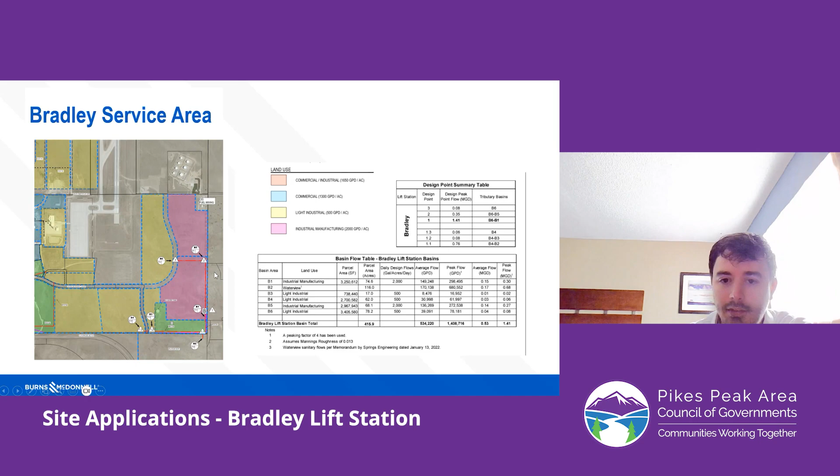Grinnell, also known as Airport Park, has been there since the early 90s, I believe, and its current flows are around 0.2 for peak hour flows, based on the meter data provided by CSU. So they're pretty low as far as what flows they're receiving right now and what they have received for the last 30 years. Although the development plan for that area could get all the way up to 1.2, currently it's not seeing that.

And then Drennan lift station, I don't know that I have meter data for that one, but I think it's within the 1 MGD range, I believe. So that's the kind of future for Grinnell and Drennan. And then Peak lift station, it's small enough that it's just going to go to probably 0.35 immediately with only the few users that will be tied to it. And then Bradley could phase in over time.

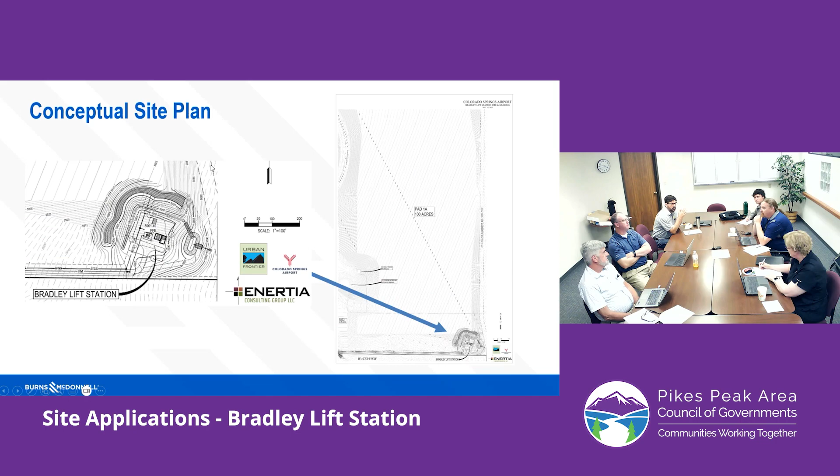That's a fair question. No one wants, I particularly don't want more lift stations, so. The topography of this area is very challenging though. Most of these drainages are separate and discrete. Where the Peak Innovation Park is, where the Peak lift station is, that wants to flow towards the Big Johnson Reservoir. So you can't really get it out to a common lift station, if you will.

Bradley is on the edge of the airport's property, and we're doing the studies and alternatives analysis now to see what we would do with land to the east of that. So we are working on determining Colorado Springs Utilities' path forward, and that includes several alternatives. One of those would be a regional lift station towards the bottom of the city property.

There's other ideas about connecting to the Lower Fountain system. There's ideas about building a new wastewater treatment facility out there too. We just haven't fully settled on one yet, but we're going through that analysis as we speak. So it's important

as we do that analysis and move forward, we really need to keep the timing good for the airport, and this lift station we see is valuable and lets them construct something now that can serve their development, since we don't know what we're going to do in the future, and what we would do in the future, we expect to take quite a bit of time to get that implemented and built. So we're comfortable, CSU is comfortable with the Bradley lift station and the way that's set up.

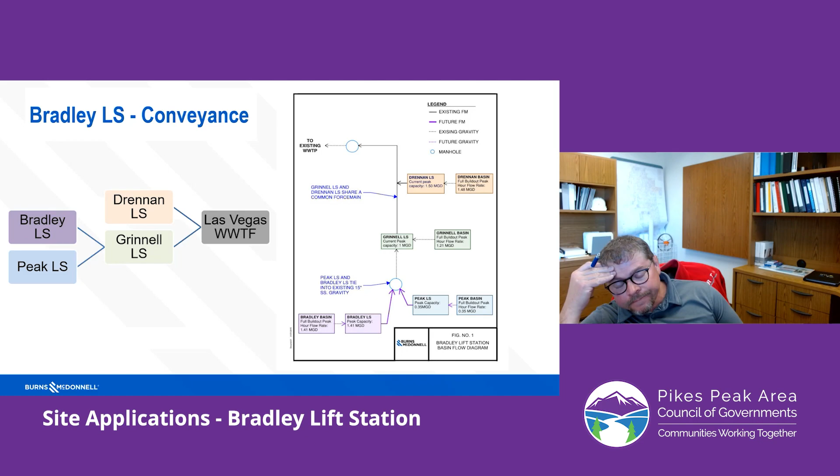Tyler, how long of a line is the force main from Grinnell to the manhole that gravities to the wastewater plant? I think it's about 2 miles, Justin, is that right? I'd have to look it up. I think it's about 1 mile, or a little bit less than that, where it connects with Drennan.

But also Justin and I were looking at the asset information for Grinnell or Airport Business Park, and I mean, that lift station's in great condition just because it hasn't been used. I'd imagine the force main could be fairly similar for a PVC.

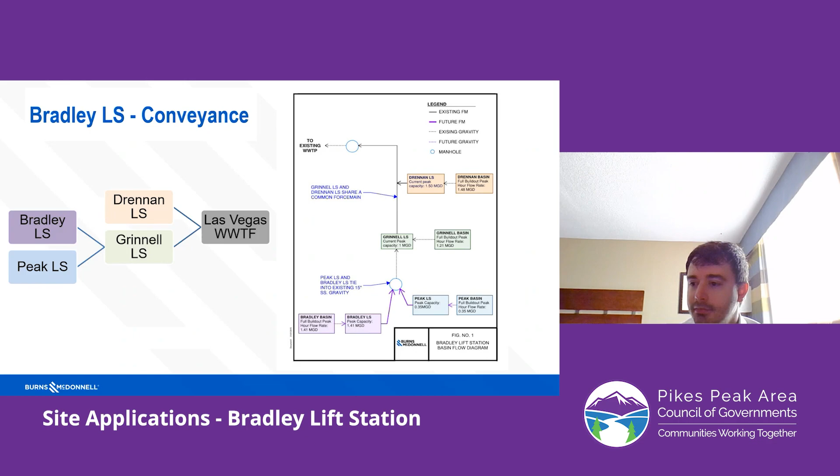I'm really loving this discussion because I think, number one, the discussion with CSU is saying, hey, we're looking big picture here, and in this area particularly, if you guys come back with another lift station, what our concerns are going to be. And we're a recommendation board, right? I mean, we're not the final say, but I think people are going to weigh our opinion and our vote. And I agree, nobody wants raw sewage running in the gutters or anything like that. You don't want it, we don't want it. But it's good that CSU's on record now about their game plan.

If there's not any more questions, what is the board's wish on this applicant? What's the board wanting to do? Well, I think we've raised our concerns, they're on the record, and as you say, CSU's aware of them. What was the recommendation from the SARC? To approve it once they answered our concerns about the force main. Right. So that was our big concern from SARC, the force main.

I would move to forward a favorable recommendation to PPACG. We voiced our concerns, but I don't know that we've provided any magic solutions, so. Not building that force main, which is probably not economic. Right. So that's my motion. Okay, is there a second? This is Mark. I'll second it.

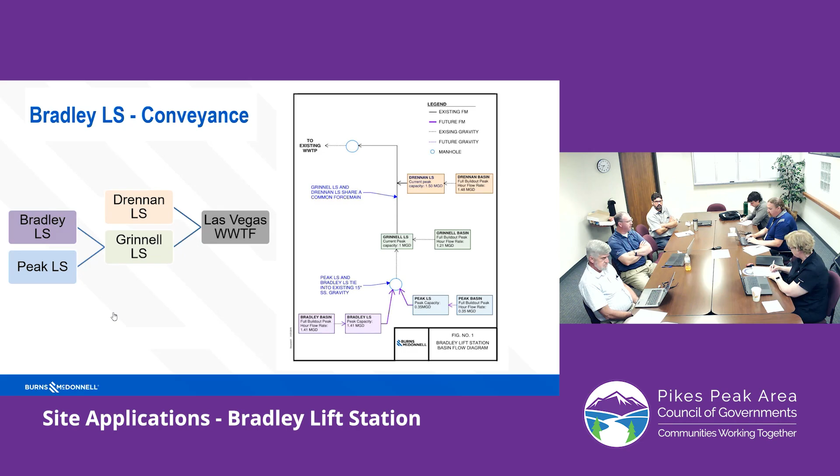Thank you, Mark. Any more discussion, any more questions before I call for a vote? Hearing none, all in favor? Aye. Aye. Any opposed? Hearing none, that passes unanimously of those here. Thank you, Tyler. Thank you, Justin, for your presentations. Thank you, guys. Again, we're just all in the same boat, right? Yeah.

All right, go ahead. Maybe just a comment. I don't know if it would help to show this committee the lift station facility plan and what we would do to inspect, just overall. Information is good information, I think. All right. So if you got stuff, but to Mark's point, and it resonated with me, a schedule of some sort, here's our game plan from CSU specifically for this area, I think that would resonate with us. Okay. Maybe we could do a little bit of both, once our studies and alternatives analysis for growth on the east side's a little more firmed up. I'd be happy to show it to this group, you bet.

And I'd also be happy to show it, I'd start with the SARC. It's just information. We're not really applying for anything, but it feels like you guys got a lot of questions about what we do and what goes on, and it might help you guys get a little clearer insight into what the game plans are, both for growth and to address the aging infrastructure.

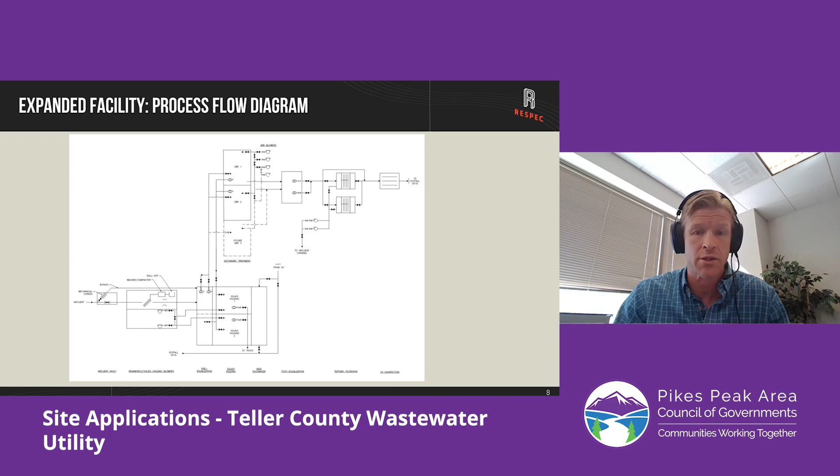Additional or a new backup generator will be provided. The facility currently relies on a cistern for plant water. We are running a new potable water line and gas service from a neighboring development. Supplemental emergency influent overflow capacity is anticipated to be provided into the west of the two future solids holding basins. And of course, all equipment will be provided redundancy per PPACG design criteria.

Once again, Woodland Park will continue to provide ORC and operator support for the facility, with Teller County Wastewater Utility maintaining the facility as part of its overall service area, and will pay for operations through sewer rates. Any other questions people have about redundancy, happy to address.

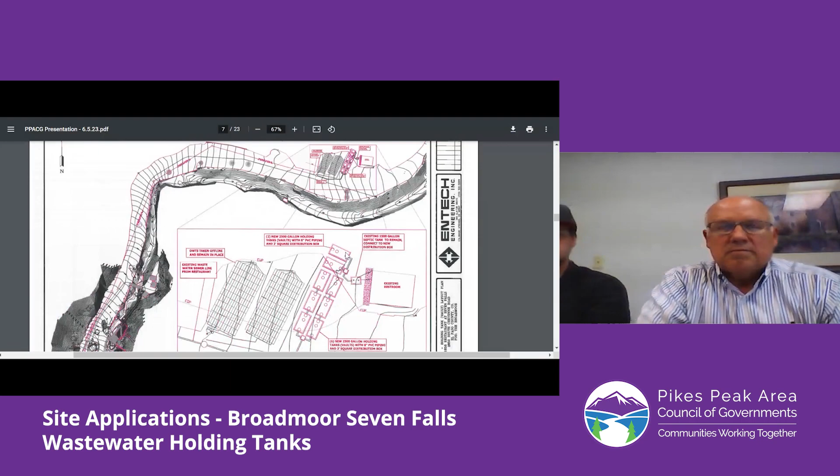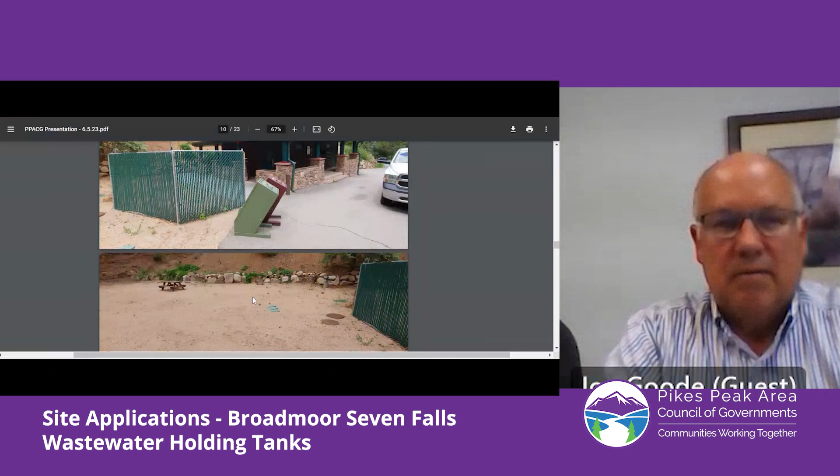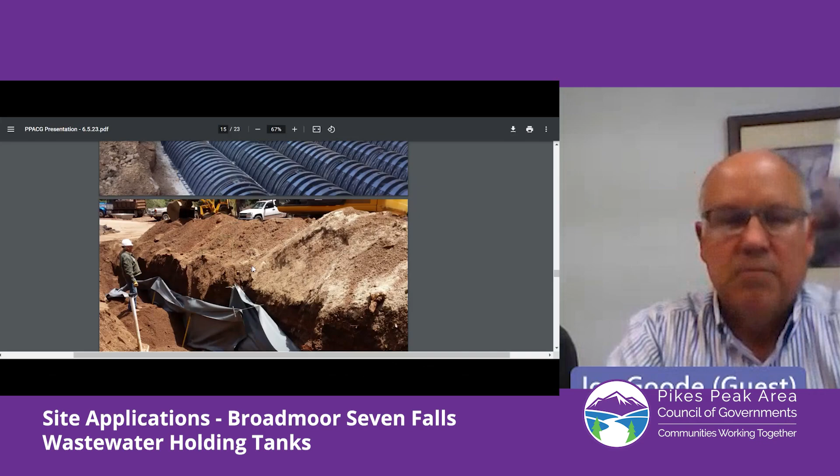If any of you have been to Seven Falls, it's a very tight canyon with a creek and very limited access and room for really anything, including a road. Here's an aerial of the restroom facilities, and the system was installed right in this area. It was a sand system. We had a liner on one side to minimize the flow towards the creek area. It had an advanced treatment system, AdvanTex or microbiotics, up by the restaurant, and a tank.

And two things happened. One is the usage in the restaurant was fairly heavy, and their demand was higher than what we anticipated, or they anticipated, and it ended up at over 2,000 gallons a day. And we've measured flows from the restaurant, and they're very high.

Really July and August are the peak times, when several days they're over 2,000 gallons a day. During the winter months, they're under 2,000 gallons a day, but during the peak season, it's well over. So it pushed us to, one, the other system wasn't large enough, and two, it pushed it into the CDPHE state review versus the local jurisdiction. And we have flow values for 3 years out here, and all of them, once they got going, were too high. And so that's what pushed us into what are the alternatives.

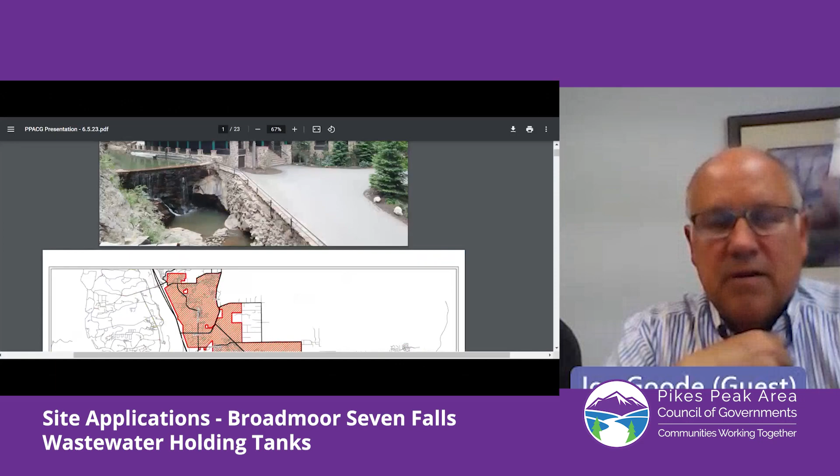We looked at Colorado Springs Utilities, and I'm backing up here, sorry about this. There's the restaurant itself, if you guys have been up there. This map here shows the Colorado Springs Utilities service area. On this map, it looks relatively close, but Seven Falls is right in here. However, it is over 7,000 feet. Let me reduce this a little bit. From the Seven Falls area here to the closest tie-in over on West Point Road, and we have a letter from the city saying that it is too far, and at this point it's not feasible or economical for them to tie into Colorado Springs Utilities.

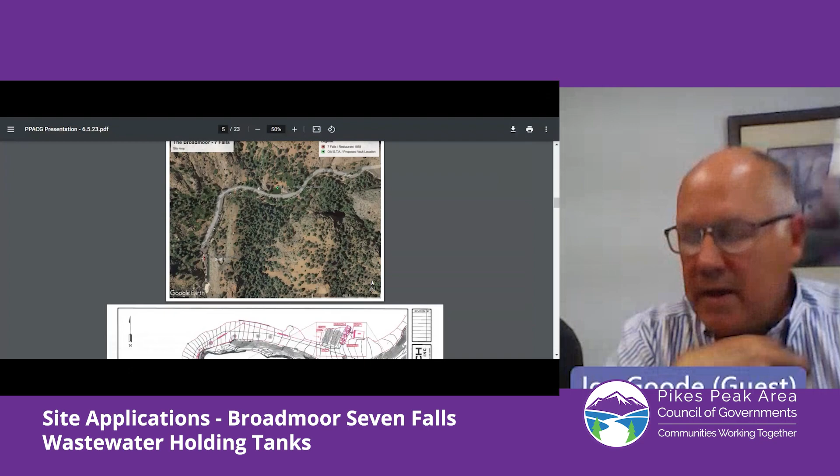The proposed system that we are looking at now is holding tanks until such time. Eventually, Broadmoor does want to tie into the city, but at a time that it becomes feasible. So the interim to keep them operating is a holding system of several tanks. They understand they will have to pump. Let me get up to our tanks. Next one. Yeah, right here, you can see where the old system was. We're proposing several 2,500 gallon holding tanks, which will give us capacity to pump. Obviously, there's not a pumper that can take all that at once. It will give them the capacity to maintain storage while they're operating, and it gives us more than the 48-hour capacity that's needed if we have something that becomes a problem.

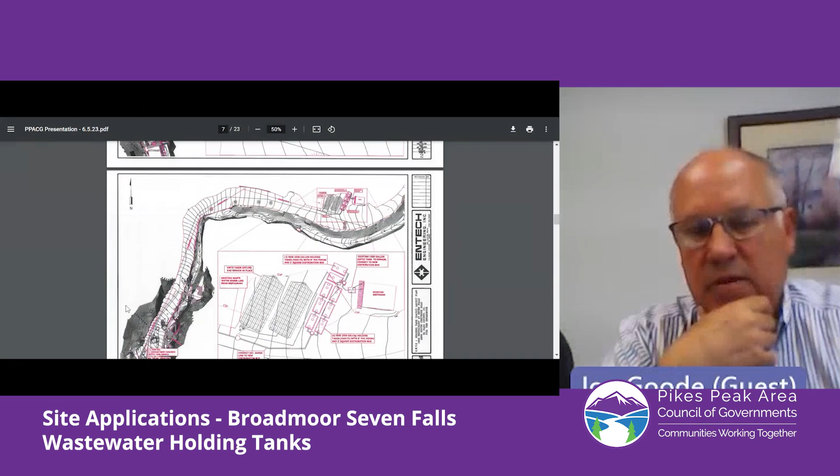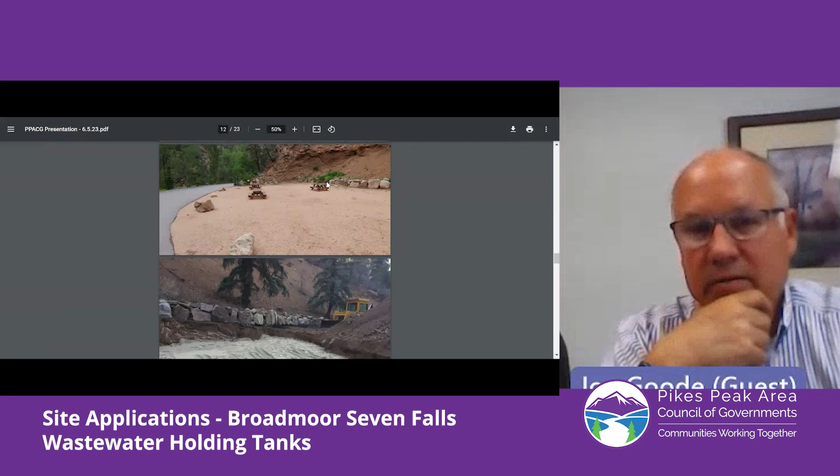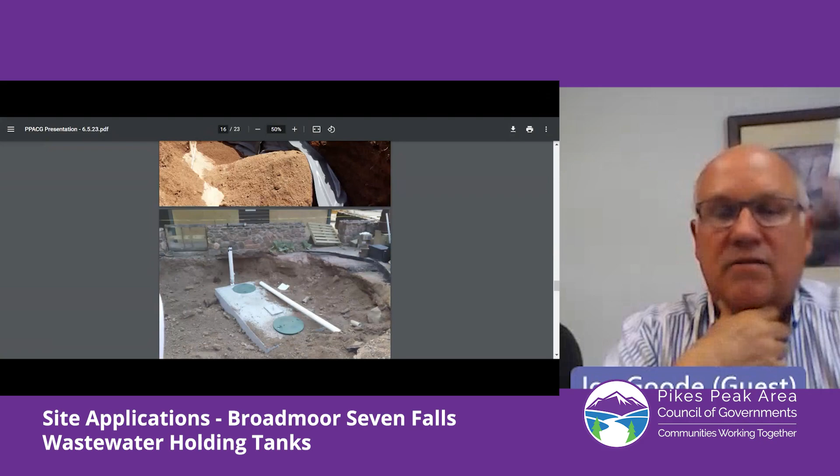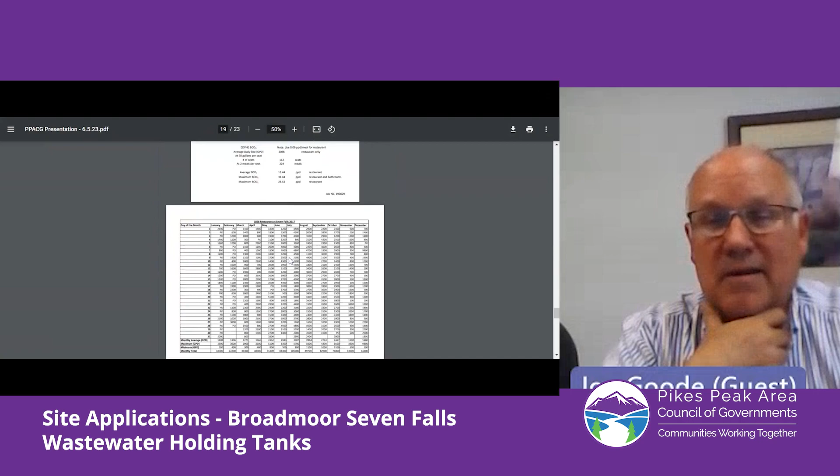So the restroom here right now is not tied in. We would propose they want to tie that in, but the flow from the restaurant comes down and gravity flows to this point. And again, the Broadmoor is aware of that. During the peak months, they'll be pumping probably every day on some occasions. And this is the same area that the tanks will be in, right in here. And this we feel is the best way at this point until they can tie in, because of the proximity of the creek and the tight canyon. There really isn't any option until they can tie in other than holding tanks, unless again they go back to less than 2,000 gallons a day.

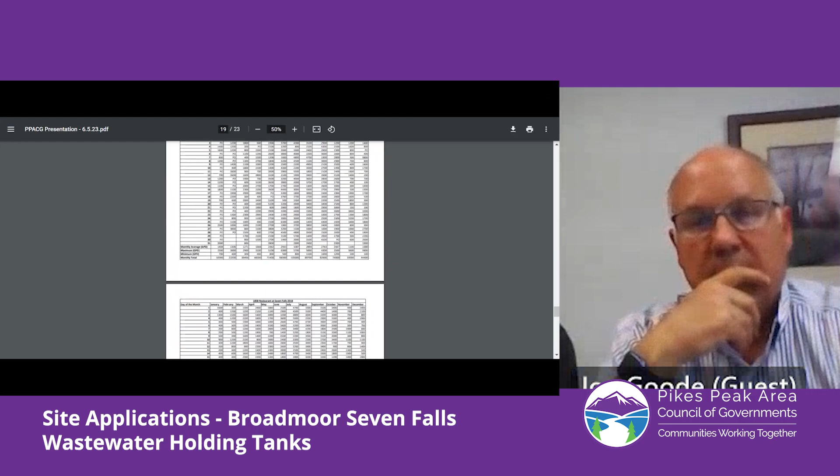That's kind of it in a nutshell. We've been working on this for a few years now. Originally, they were going to try to keep the flows down, but after they saw where the tie-in was and the meeting with the county, that's when we pushed it up to the state level so that they would be able to operate until such time that they could tie into the city. Any questions? Any questions for Joe regarding this?

Kind of a curiosity question. So the rated capacity of the treatment system is 2,000 gallons per day. How is the flow between the tanks and the treatment system limited to keep it under that threshold, or is that limited in any way? No, with the new system, basically the flows are what they are. We have capacity to handle it. The old system had that limitation, but not the new system. There's about a 2-week period that really has the high flows. The majority of the flows are in that 2,000 to 3,000 gallon a day range. We're proposing 25,000 gallon capacity for the entire system.

So it's not controlled. It's gravity fed to the tanks. They will have monitors in there and alarms at the point that the tanks start to become full. Our anticipation is that their pumping schedule will be such that that really won't be an issue during the peak periods. Are the pumps gonna be automated?

No, when you say pumps, it gravities to the tanks. The pumpers will come out to pump and take the effluent away. Okay. Yeah, they'll be on the trucks themselves. Gotcha. So the water will back up from the existing system into the tanks if it's exceeding capacity. It would back up into the line that gravity feeds down to this tank. Yeah, these tanks are vaults. They don't lead anywhere. There's not a soil treatment area after the tank.